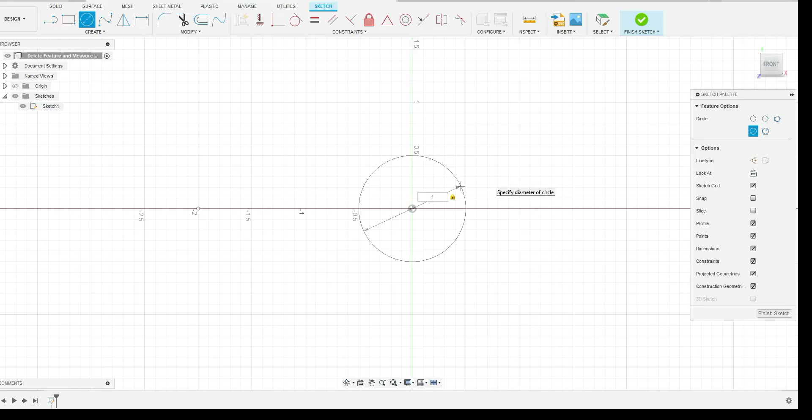Alright, so we're going to do editing our features here and then also using the measuring tool. So we're going to start out drawing off this basic part. It's just like a pipe support. So it has a hole in one direction for the pipe to go through, and then another hole in the opposite plane that you can screw to the wall or a rafter or something like that.

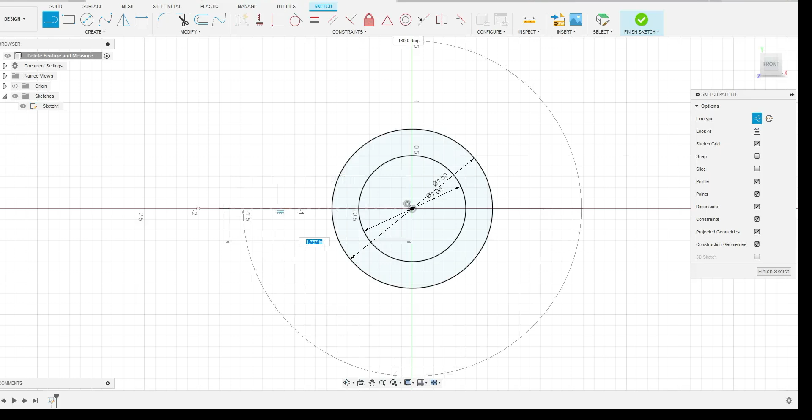So we're just going to draw this out. So we have two circles, an inch on the inner circle, an inch and a half on the outer circle. And then I have this reference construction line that is 2 inches long. Okay, and then out here I'm going to have a line for the end of my part. Okay, and then I'm going to put a point right on the middle of this. Okay, so that's the midpoint there where the triangle appears.

And then I want to make these 2 points coincident. So when you're clicking on these, make sure that you're getting both points, okay, and not part of the line. You want both of those points to be coincident to each other. Okay, and so that snaps to there, and it's kind of stuck in the middle now, and it won't move.

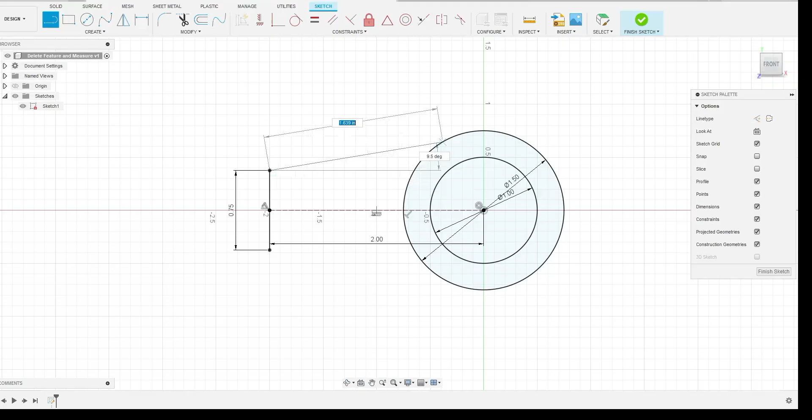So then you can take two other lines here, and you draw those up to make sure that they're tangent-ish to the circle, and make sure that they're blue. So this bottom one drew in with black. That means it's fixed to some point. We don't want it to be fixed because we want to assign it to be tangent. So if it turns black, just delete it, redraw it. You clicked somewhere where it auto-constrained.

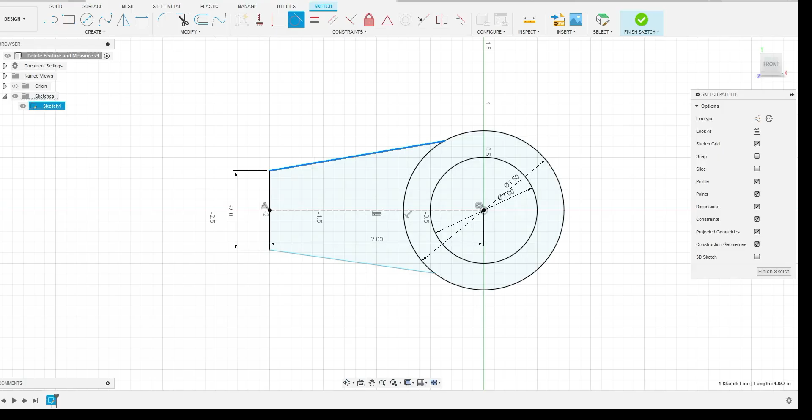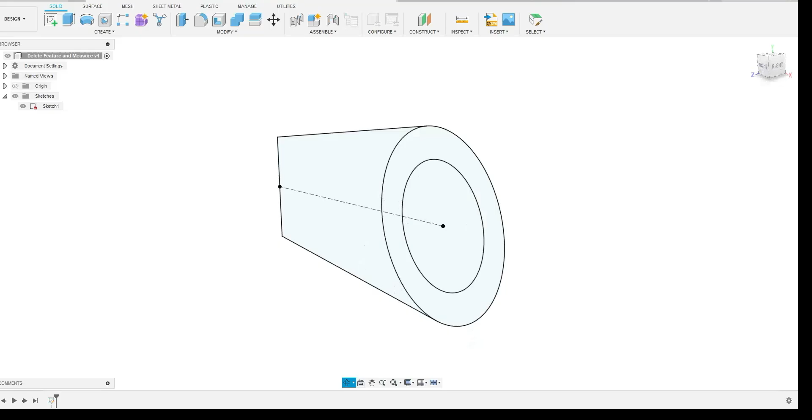Okay, so then I'm going to use the tangent tool here. So click on the line in the outer circle, and then my line runs tangent. Okay, then I'm going to extrude this. Okay, so I'll turn on my sketch, and we're going to extrude the circle portion up a 1/2 inch, and then that trapezoidal kind of shape that's attached to it, we're going to extrude that up to 0.3 inches. Okay, so now I have one piece of this.

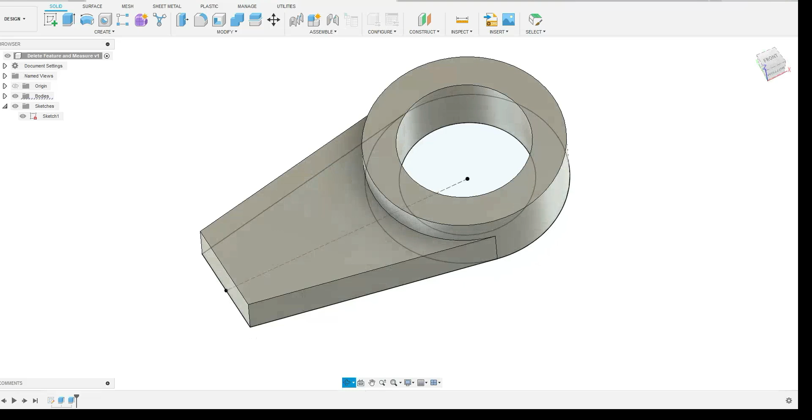Okay, and then what I want to do is draw on the end of this. So I'm going to get my sketch tool out, I'm going to click on the end, and I want this drawing to come out the same direction as the higher portion of this mounting bracket. Okay, so I'm going to draw a circle out here kind of as reference, and notice how I put it pretty close to in the middle there, lined up with the origin.

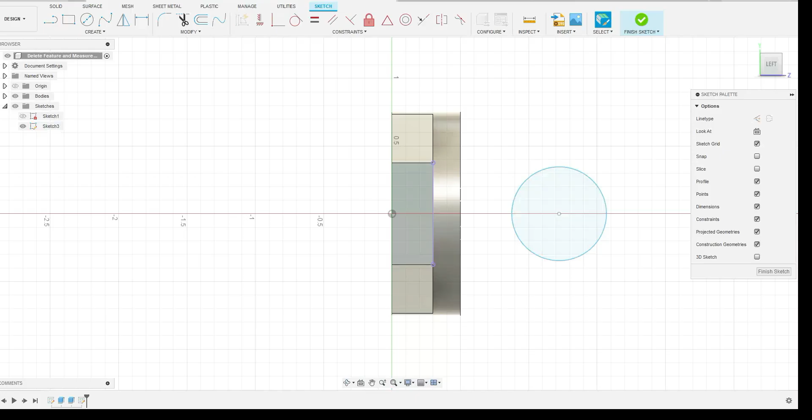Okay, and then I'm going to project this line that I want to reference to. So I'll use the projection tool. I'm going to click on this line so I have those two ends from the first extrusion to reference in my sketch here. And then I'm just going to draw a line out from each one of those. Okay, and now we want to constrain this. So we want to have the circle attached to the lines. And notice I haven't put a dimension on the circle yet because I want it to fit the lines.

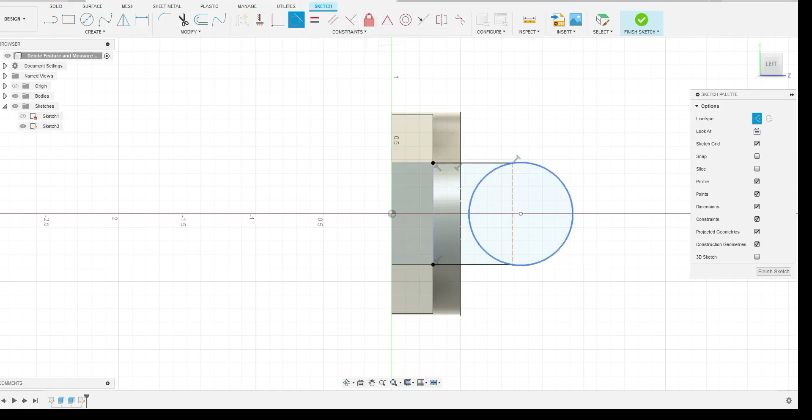So right now I'm just drawing a construction line through the center of the circle. Okay, and then I'm going to use the coincident tool to attach the circle there at that center. Okay, so notice how it kind of shifted it away from center. And now I'm going to use the tangent tool. Okay, and I only need to tangent one end. If I try to tangent the other side, it's going to give me an error that it's over constrained.

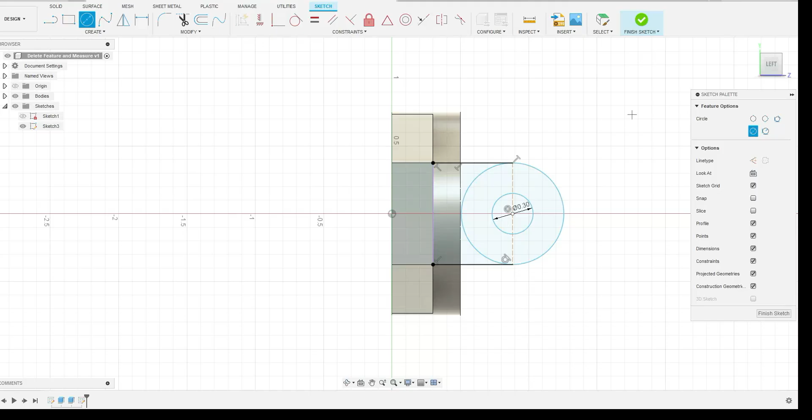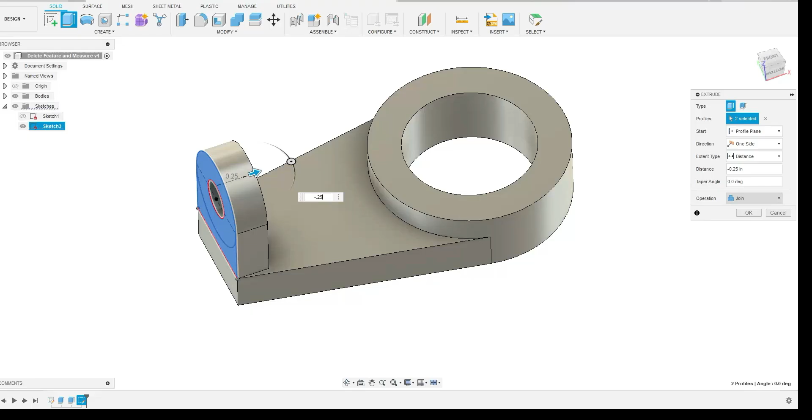Okay, and then I'm going to put a hole here in the middle that we can extrude here in a minute. Okay, and we'll give that a dimension of 0.3, and we'll set the dimension here for this line to be 0.5 away. Okay, and then I'm just going to extrude this out. So I'm going to click on the pieces that I want, and we'll extrude this out to 0.3 and 0.25. Okay, so this is just the piece, the body that I want to show you some of these other features. So we're going to work on deleting and editing features.

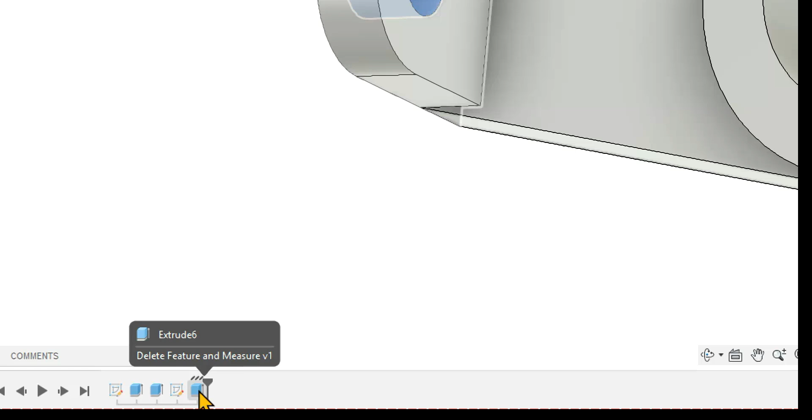Okay, so for example, if I want to change this hole, so maybe I don't want it to be this circle, I can come down here in my timeline and I can right click on the extrusion that I made, and I can edit that feature. Okay, so I can get rid of it if I don't want it, right? I can change the size of it, the extrusion, right? So let's change this to 0.3 just to show how to change it.

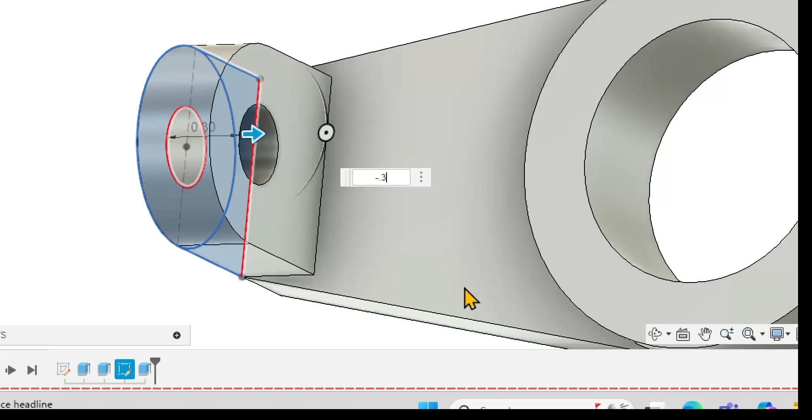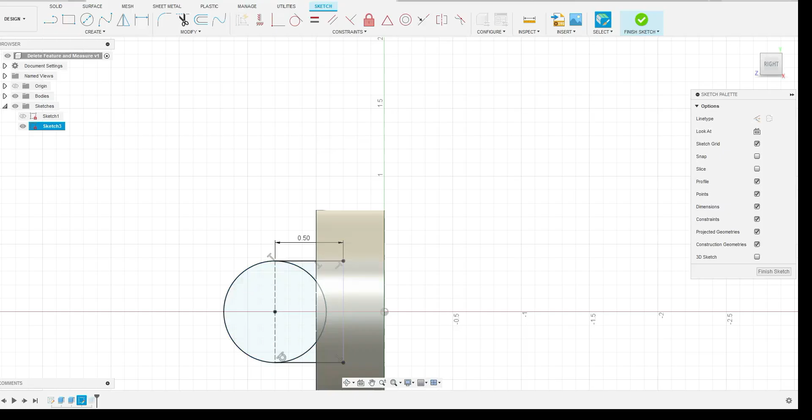Okay, and then maybe I don't want just a hole, maybe I wanted like a threaded hole, or maybe a square slot or something like that. So if I want to edit my sketch here, I can click on this circle that I drew and delete it. Okay, and then I can go back because I have that center point reference there on my sketch. So if I turn that back on, I can use that as a reference to use the hole cutting tool that we've used in past lessons.

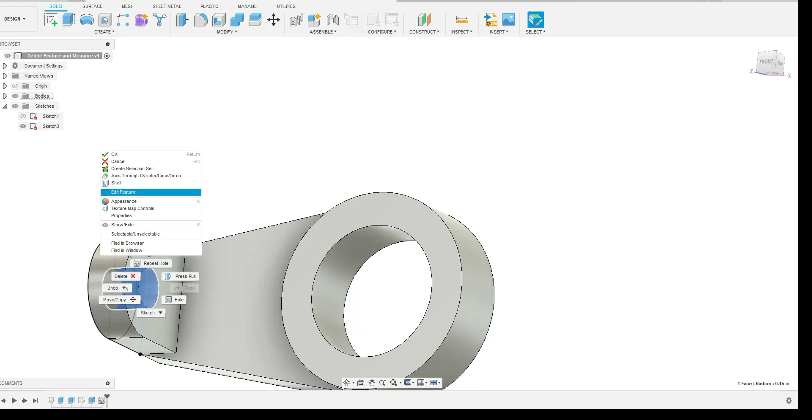Okay, and then maybe I want to have that threaded. So right now it's just a hole. Okay, but if I want to edit it here, I can right click the feature and hit edit feature, or go down into the timeline. Okay, and then I can add a thread to this. Okay, so this is nice when you want to change designs, especially if you're working with somebody and they give you a suggestion to the design. You can go back in and change it without having to redraw it.

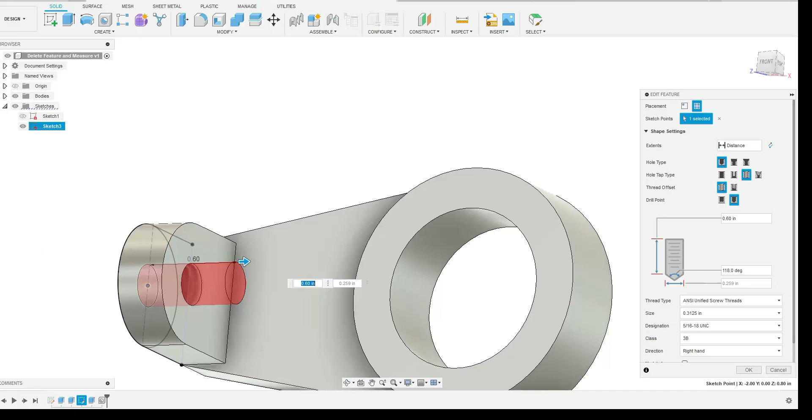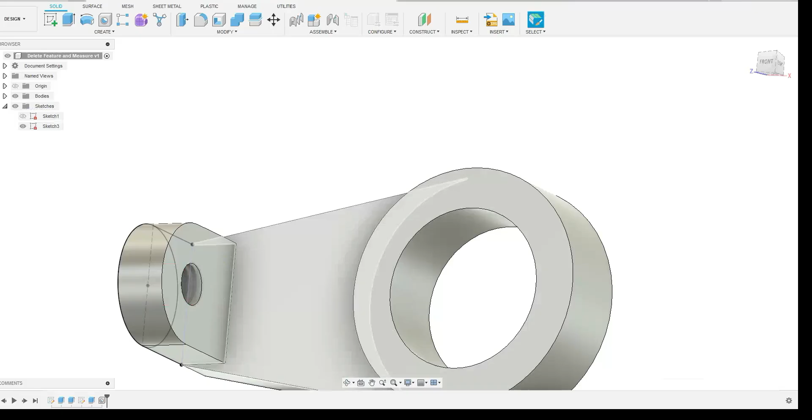Okay, so here I'm just kind of playing around, adding some other features of things that I wanted to change, right? Okay, and notice that I can't cut the hole out into empty space here. Okay, so the hole tool has some limitations, whereas the extrusion, if I wanted to put like a pin there, I could extrude it outward.

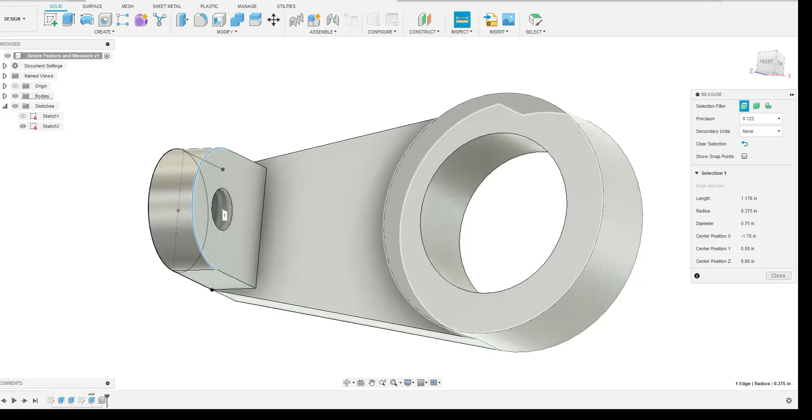All right, now this is the second piece here. This measurement tool is nice because you can reference any piece. Right, so here I clicked on the circle. It gives me radius, diameter, circumference, all that information. If I want to know the distance from one feature to another, so like from the edge of this circle to the edge of the bracket, I can click on those 2 points. If I want to know from this hole to the edge of the other part of the hole and then the center, I can click on those and it'll show me. Those come in nice for things if you're trying to measure a clearance or something like that.